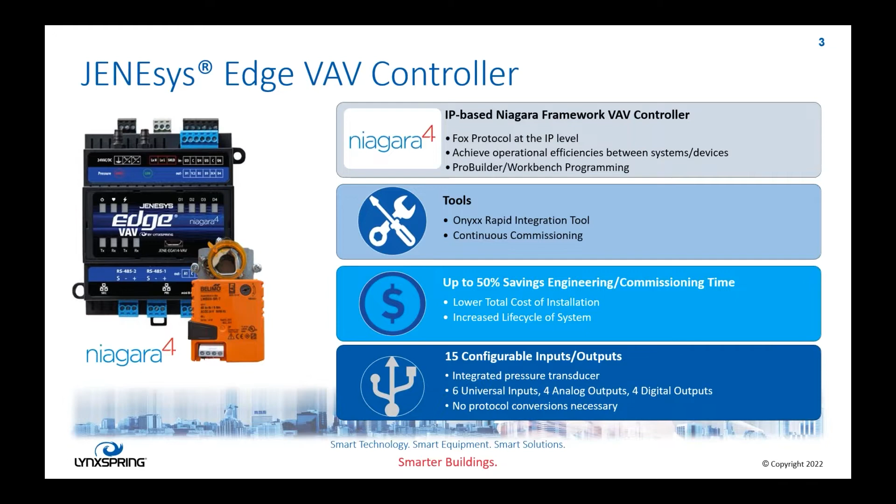And the controller itself is 6 universal inputs, 4 universal or analog outputs, 4 digital outputs, and then we do have the 15th input, which is our differential pressure sensor. So when you get the controller, it is fully commissioned. It's got the software loaded on it already. It's ready to go. The only thing that has to be touched on the controller right now is the IP address. We need to load the IP address into the controller. Licensed. We'll get into that a little bit later.

But G36, instead of having every engineer in the country coming up with their own best sequence of operations, they have provided a sequence of operations for us. We are fully G36 compliant, but we've also added some things in there so that if you need to customize your station, you can customize that station with the G36.

So on that, the VAV, we've got the balancing tool. The balancing tool is built into it so that the balancer can come in there. He can override everything he needs to override on that controller to completely check it out. To force the boxes to max, force them to minimum, put the K factors in, turning the heating on and off, everything that we need to do with that. It's got a commissioning tool that we'll get into details on a little bit later.

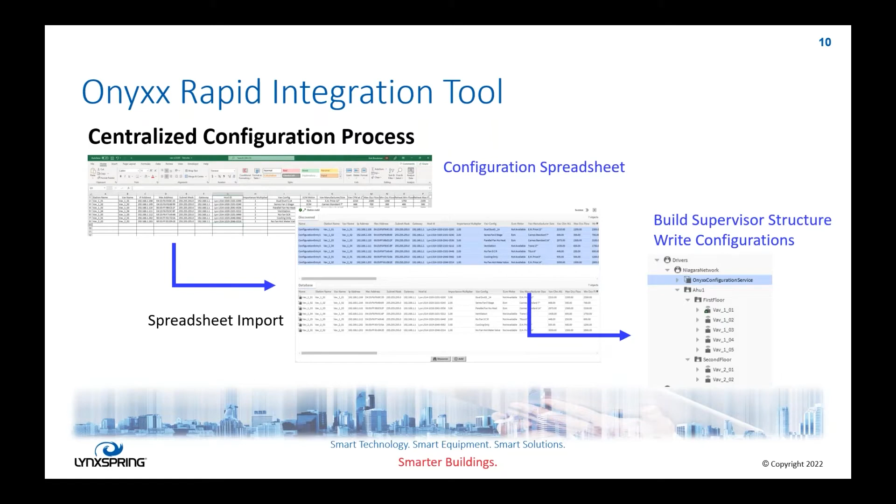We are currently working on the floor plans, so we've got the software in there. We're still in testing on it. By the time that people actually receive this, that should be part of the package. So everything that you need for that VAV is built. All of your global stuff is built. All of your air handler logic is all built for you. Your morning warm up, your night setback, all of those features are built for you through the integration tool.

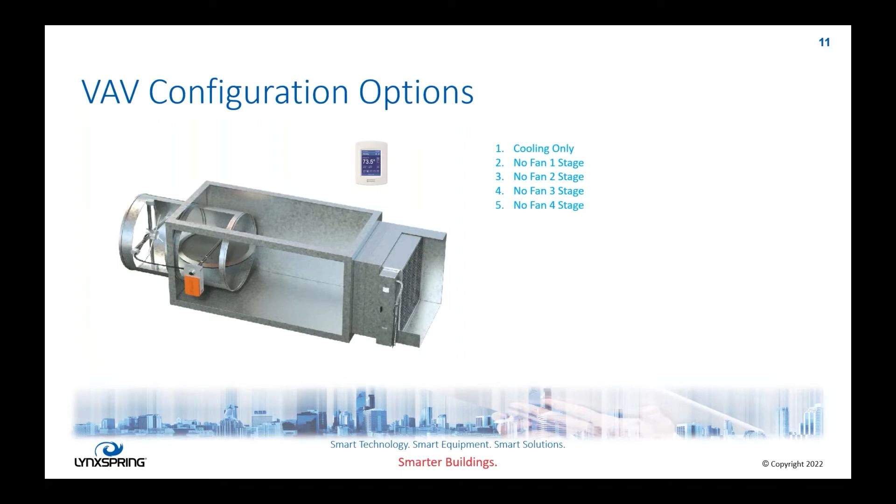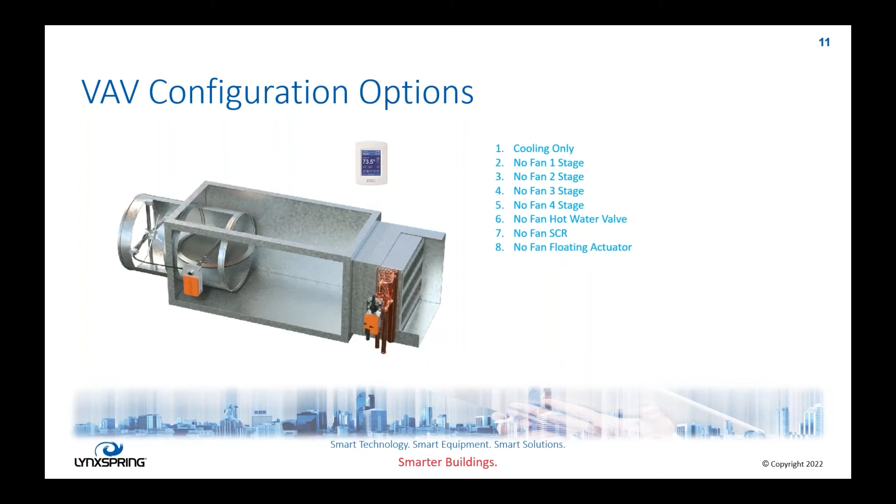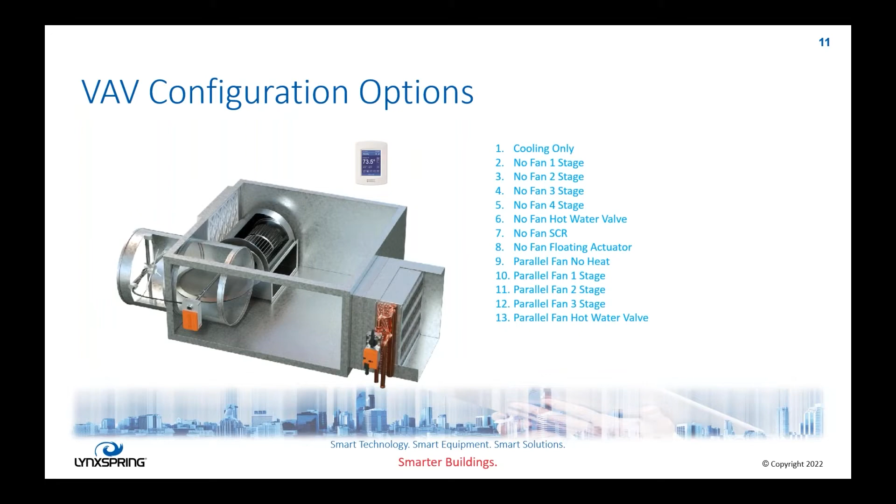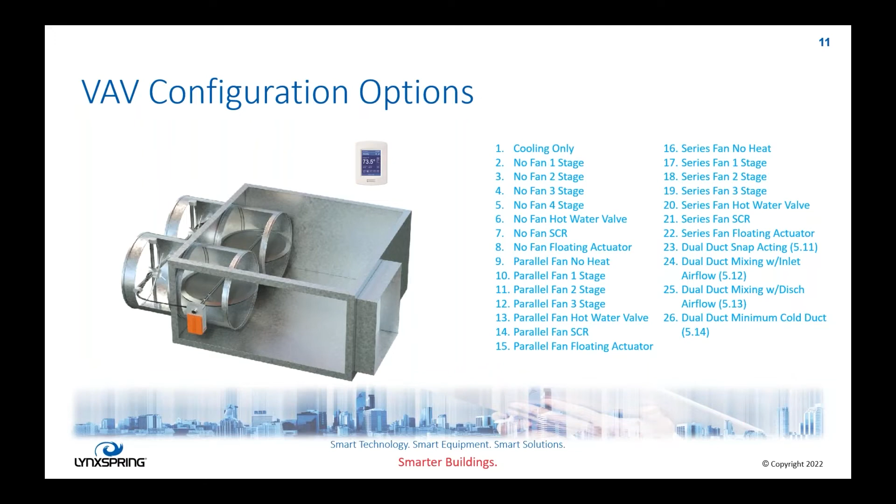We do have in there a dual duct controller. The dual duct controller is still in the final stages of testing. It's not an officially released option. We need to get field testing on that. In the very near future, as soon as we get some field applications, dual duct will be completely supported, as well as the ventilation box. The ventilation box is still in testing, but the logic is done. We're still testing both of those configurations.

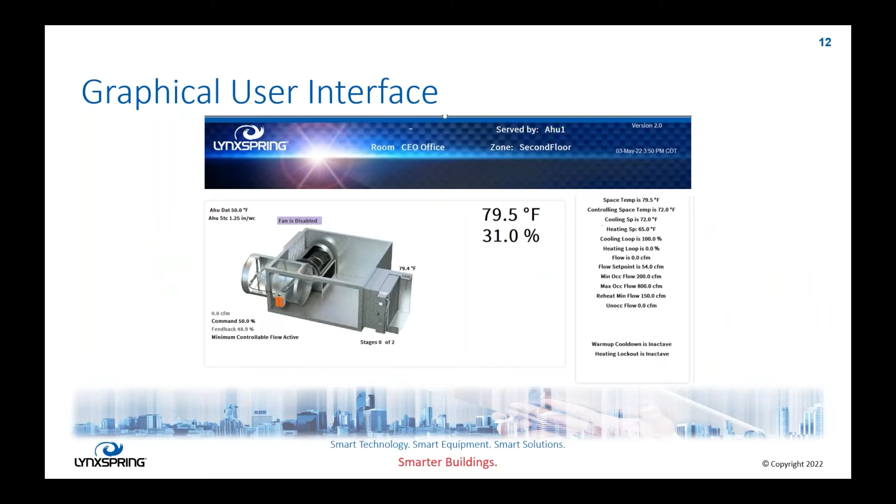The graphical user interface, like we've already talked about, you pick the VAV, it builds the graphic for you. The analog inputs and outputs, the digital outputs, the analog outputs, those are completely configurable to do whatever heating you need and whatever exhaust fan applications you have. The universal inputs, we have a few of them that are configurable, but most of them are in certain places, so we can't change those yet.

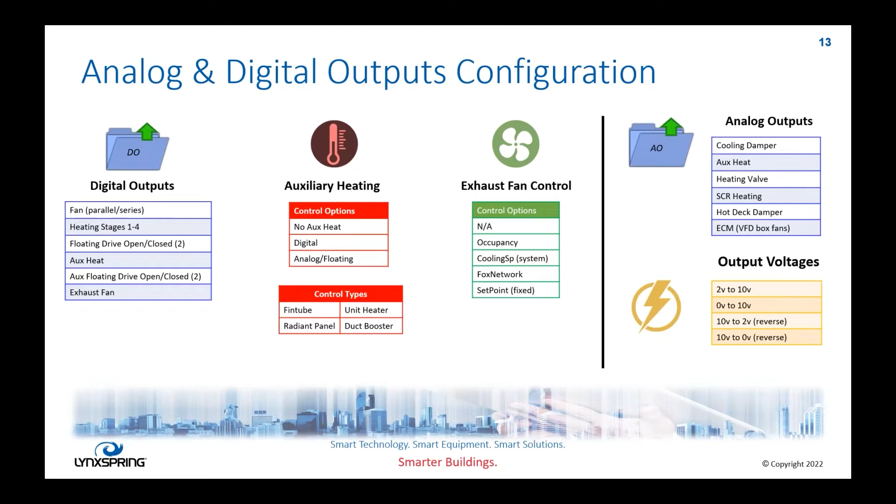So Kirk, would you also tell us a little bit about the commissioning tool that you developed? Yes, so every VAV controller also has a commissioning tool that will run a VAV through its paces for both the cooling damper, if it has dual duct, a hot deck damper, and with auxiliary heating, any heating stages or valves. The whole purpose of this is that it puts it through its paces and conducts tests. Those tests have a pass or fail.

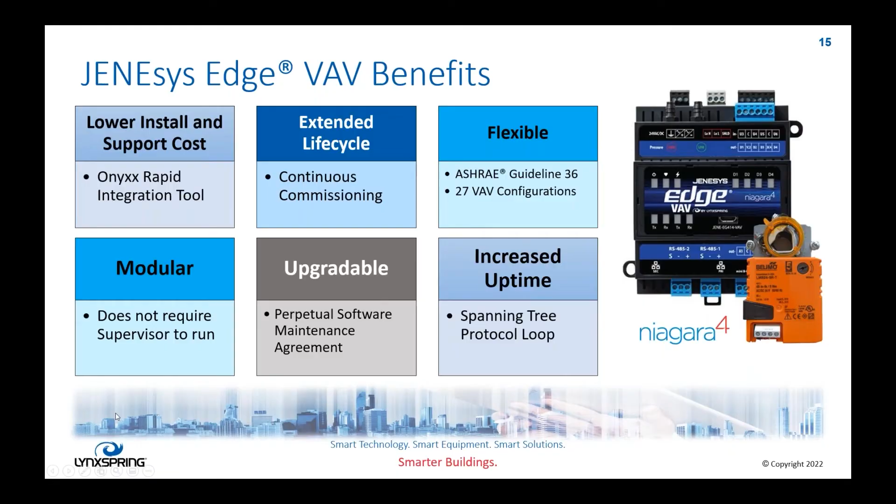So in the uptime, the spanning tree protocol gives us that extra level of redundancy out there. So that's the end of our presentation. Do we have any questions that have been asked so far?